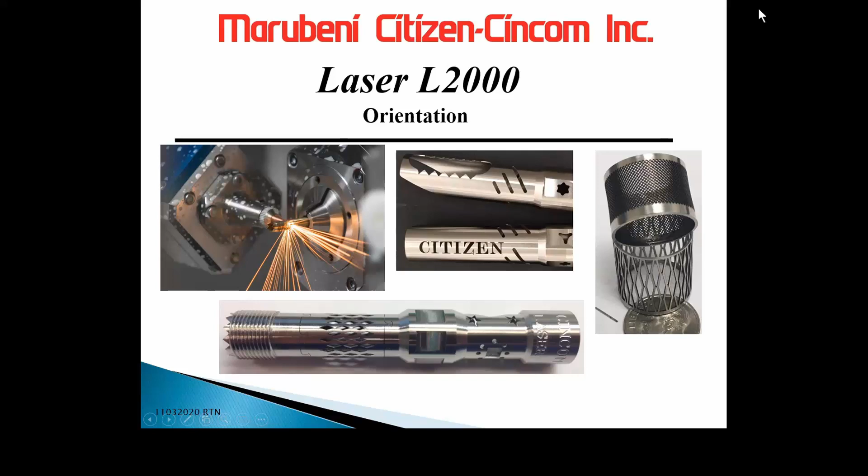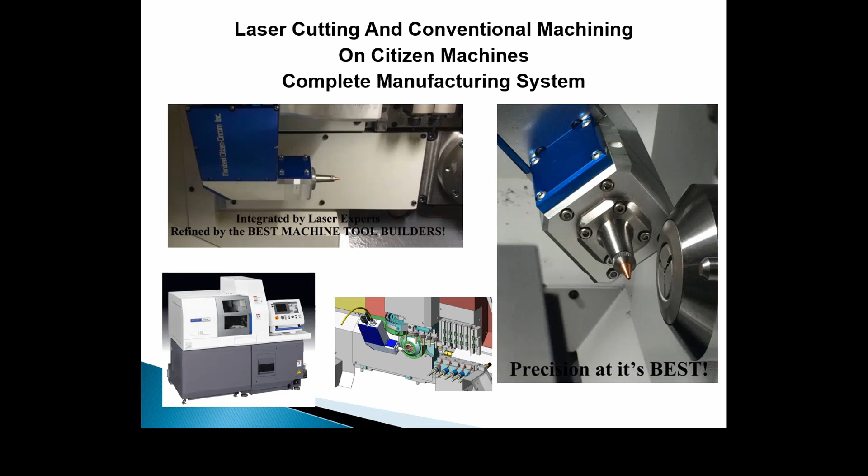Our L2000 laser system began development in 2013 and was available on the market in late 2014. We developed this as an add-on option that could be attached to not only new machines but certain older generations of our L series machines. We designed this to have as little effect on the machine's capability as possible.

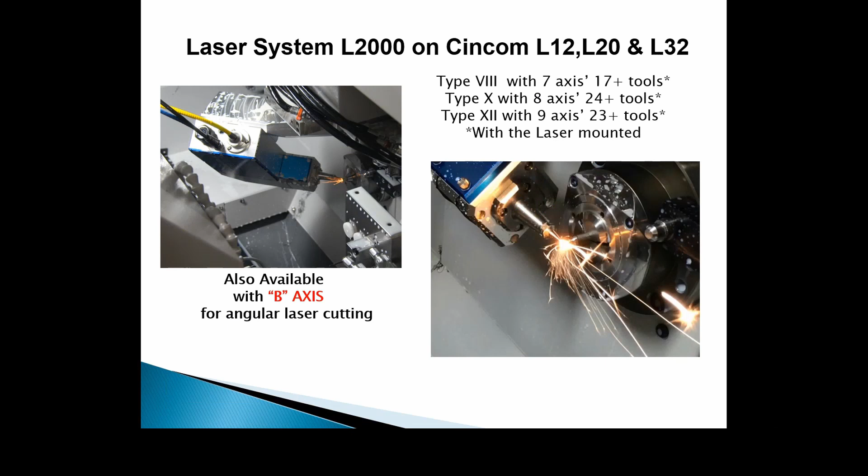The L2000 is available on all of our L series machines from 12 millimeter to 32 millimeter, also on our A20 Type 7 machine, and beyond that, our Miyano BNA 42mm GTY machine.

Some of the major benefits of having a laser in a multi-axis machine is you can cut just about any shape, get minimal burrs, it's faster than EDM machining, you get conventional machining and laser machining on one platform. And you can do laser cutting and or welding with a single head.

With the use of a bar feed, you can run up to 12-foot long bars, tubing, or solid stock. This will allow you to get continuous, unattended operation out of your machine.

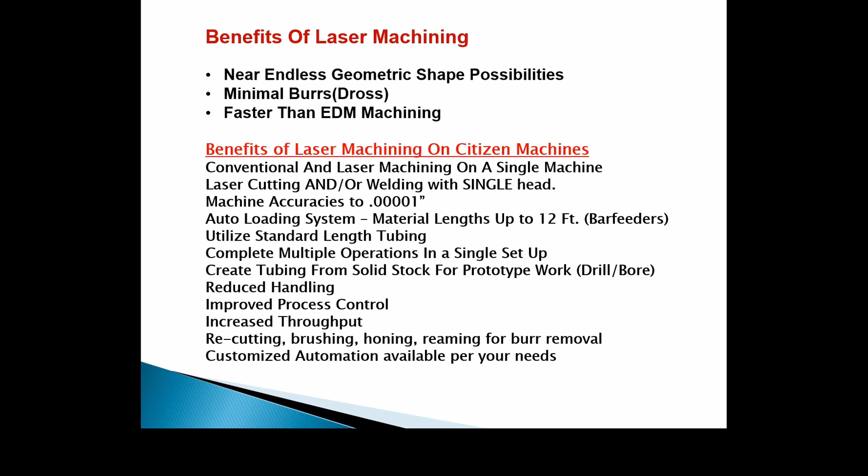With the multi-axis machine, you'll be able to complete multiple operations in a single setup and attain reduced handling, improved process control, and increased throughput. You'll also be able to do any recutting, brushing, honing, reaming for any burr removal that might be needed.

We utilize the IPG Photonics lasers in our system. They are the leading provider of lasers in the world. The laser is 100% supported in the USA. We have multiple power levels available from 100 watts all the way up to 3 kilowatts, all air-cooled.

Our system has an internal pulse generator with endless parameter possibilities. We've included an air conditioning unit built into the cabinet for temperature control. We can connect up to 3 gas supply lines.

We have integrated our system so well into our machine that we can program everything that's needed from the part program. We have programmable modes with pulse mode, burst, continuous wave, or quasi-continuous wave. We can create special macros from the part program, send it to the laser.

We also have programmable gas or air pressure and the type and selection from the program. And to top that off, we have a programmable collimator to fine adjust the focus position. You can tell the focus where to be on the part from your part program.

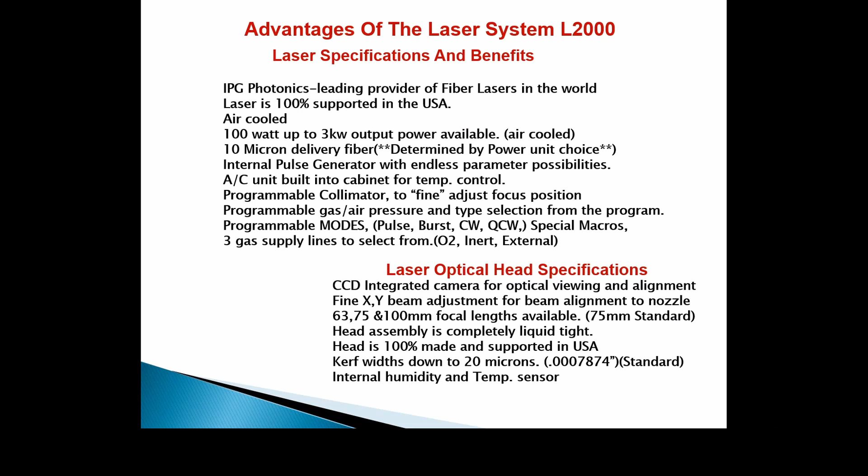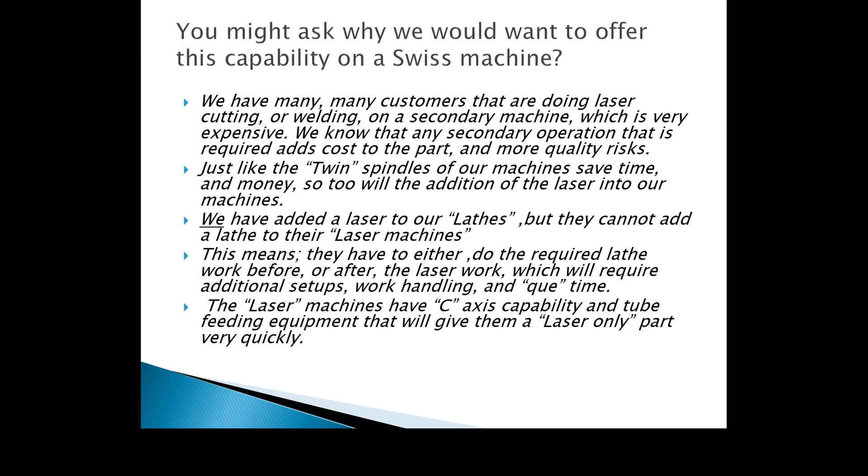So you might ask, why would we want to have a laser on a Swiss turn machine? What we found was many of our customers were doing parts that had to go to a secondary operation to have some laser cuts done, some of them very simple, just a turn angle or so forth. When that happened, they had secondary setups and queue time and all of this. Now we've tied it all into one machine, so you're in one process, you get a complete part straight off the machine.

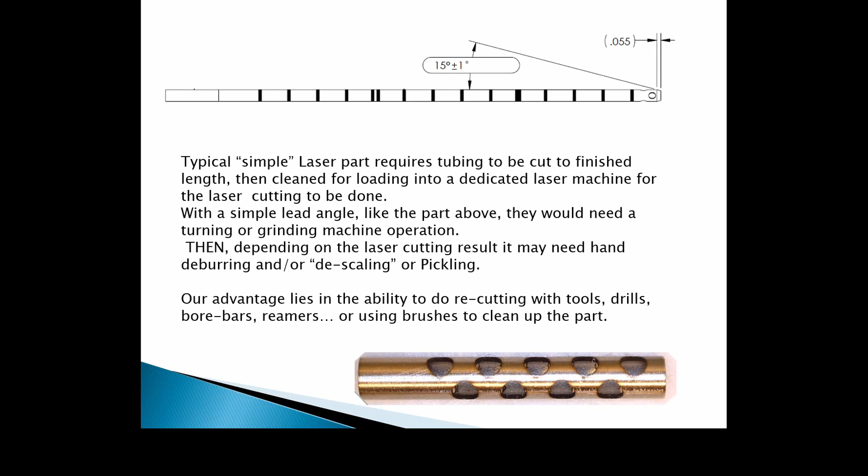The typical components of a traditional laser machine has a laser oscillator or power unit feeding the fiber down to the laser cutting head, which is also being supplied assist gas of some type, depending on the material you're cutting, going through the nozzle around the beam.

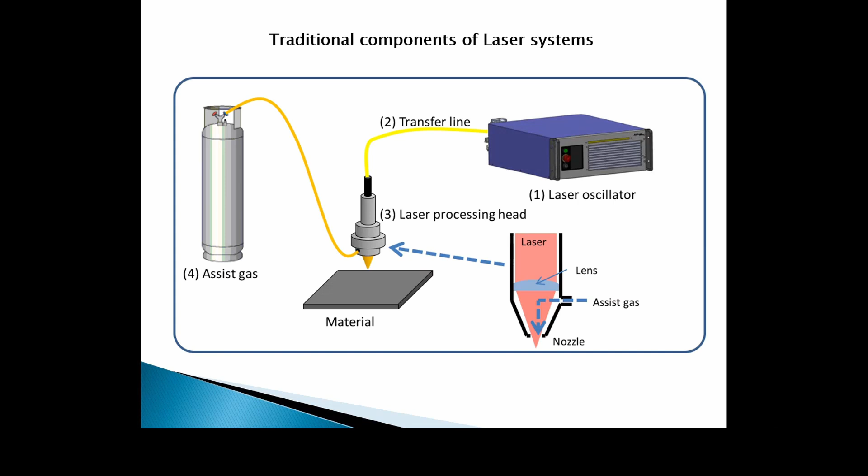The L2000 system has a control cabinet located behind the machine, which encapsulates the power unit. The power unit has the fiber, which runs through conduit up into the machine, into the laser head, which is mounted from the gang plate.

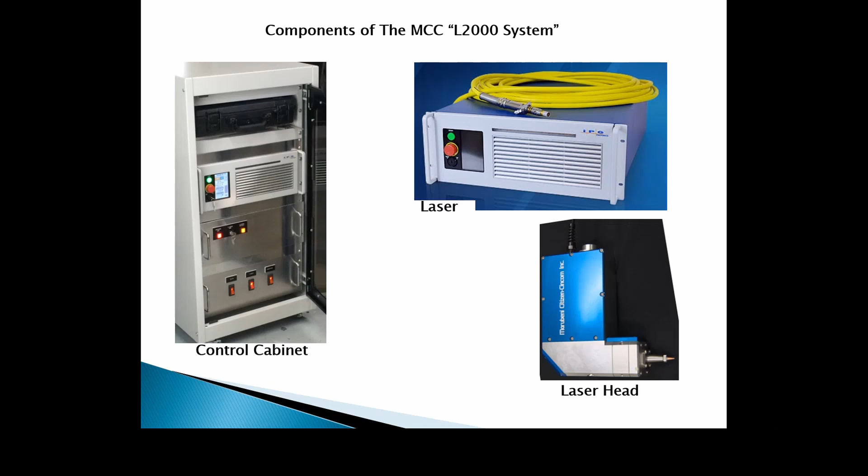We have mounted a touchscreen PC monitor above the machine control, which will display the settings being sent to the laser, and also has the software for the camera, which you get the camera view that is looking out through the nozzle. The camera view is most helpful during setup or replacement of the nozzle, which helps direct the assist gas around the beam as the beam is cutting into the material.

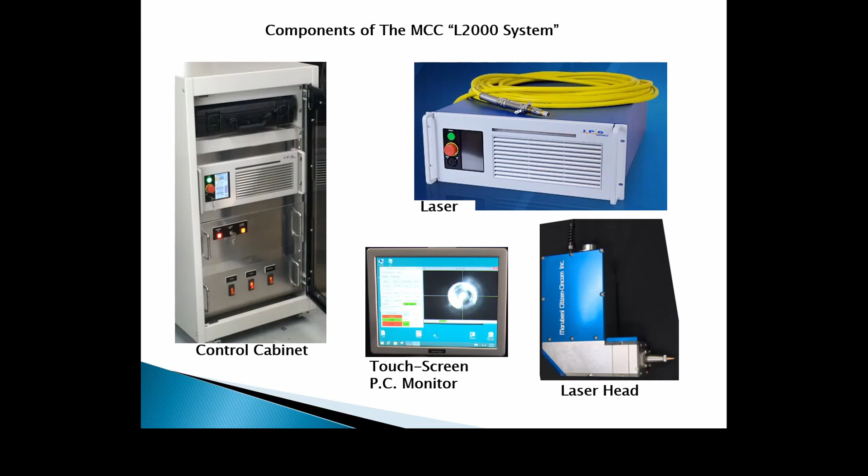The laser controlling software is called IPG Link. This is where the cutting parameters are displayed when they're sent to the laser unit.

The settings needed for the laser to work is going to be setting the mode, the pulse width, the size of the beam shots, the frequency, how many beam shots per millisecond, the percentage of power of the unit that you are using, the gas type you're using, inert, oxygen, or air. You will also set the pressure for any air, gas, whether it's inert or oxygen.

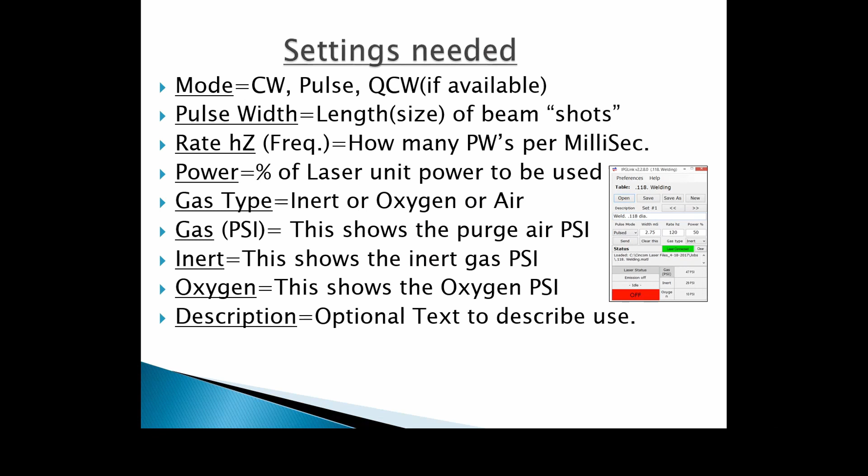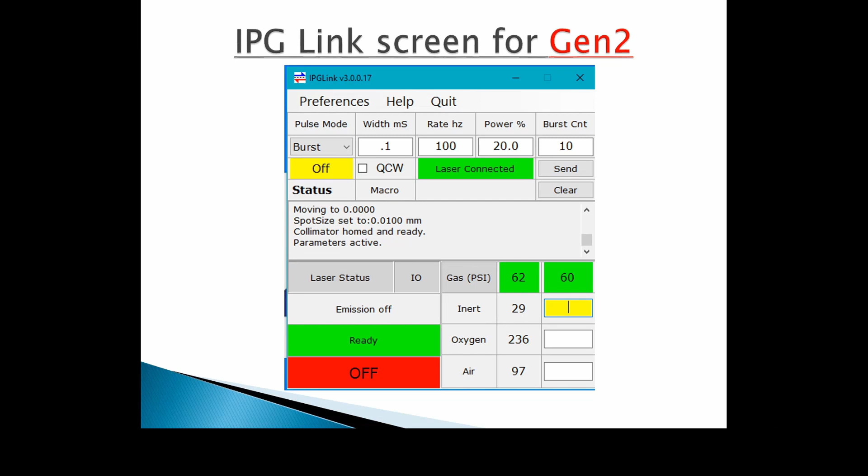Here we have the IPG Link screen, which will be displayed up on the PC monitor. Here you will see the commands have been sent from the part program to the system to show you what is happening with the laser system at any given moment. You can also manually enter information here to do a kind of a test before you run through the program to see if everything will be accepted by the system.

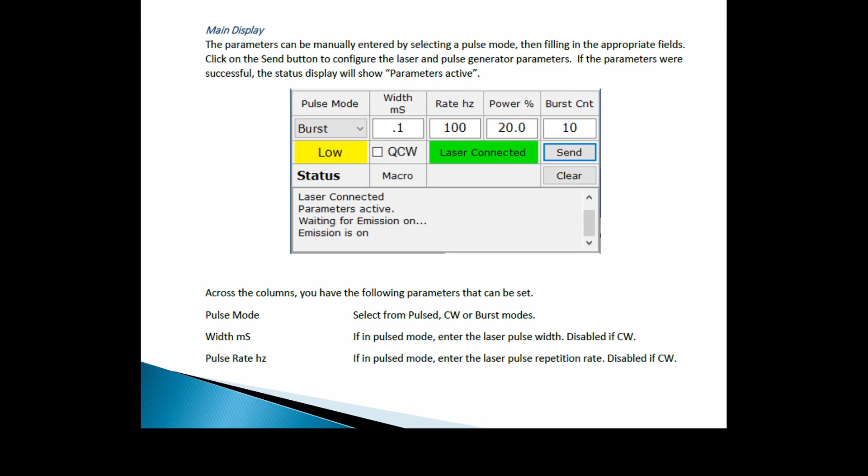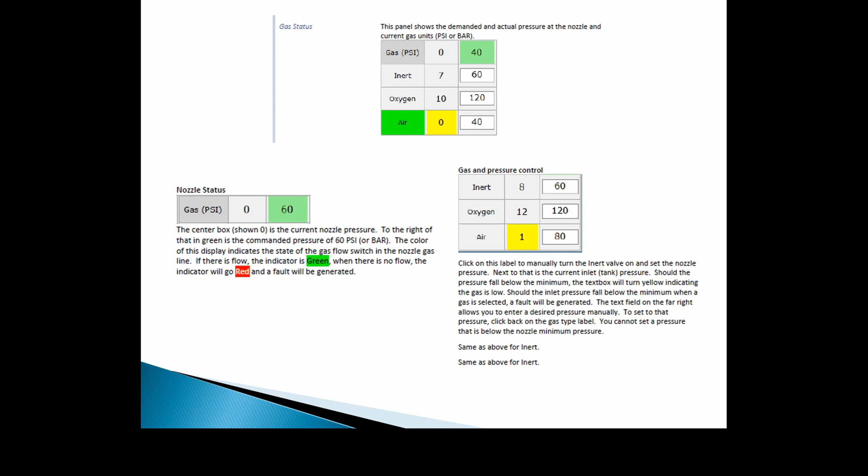Displayed here are the available pressures and the program pressures that might have been sent from the part program to the laser system. The status box is a list of the last 4 commands that were executed by the laser system.

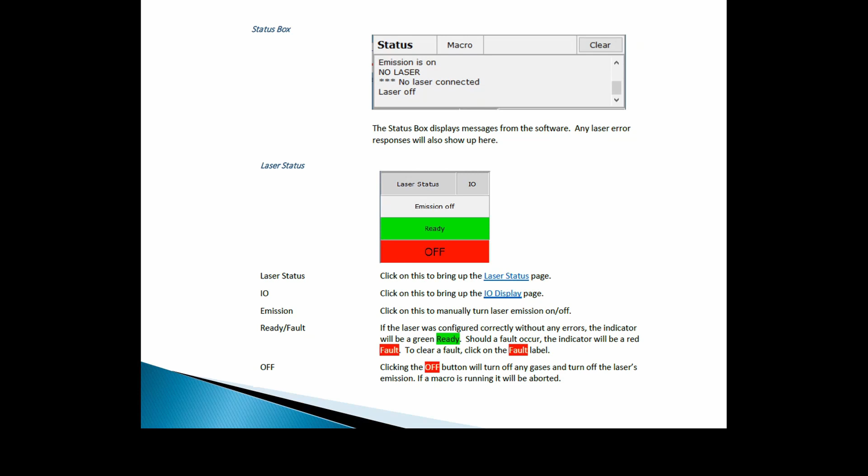In the lower left corner, there are a few buttons that you could push. The laser status brings up an additional box showing the status of different functions of the system. The I/O button also brings up another box which shows what inputs and outputs are being executed. Then there is the emission button where you could turn emission on and off, and the ready fault tells you if it's in the ready state, fault state, or stop. And then the off and on button at the bottom.

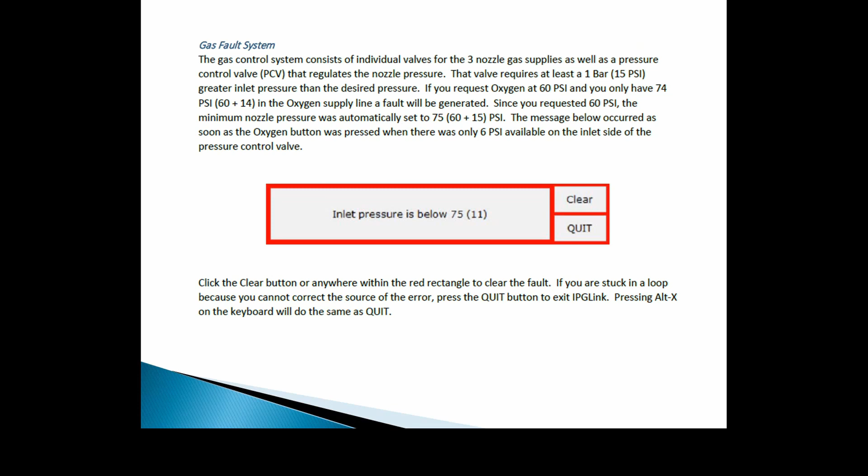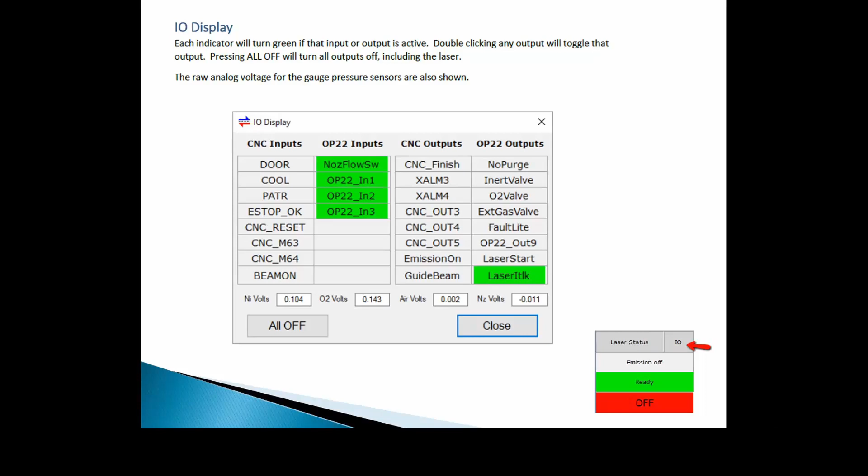In the main display box, it will show you any faults or errors that might occur during the system, giving you a short explanation as to what might have gone wrong. When pushing the laser status button, it will pop up this box here, which shows the status of different functions inside the system. Here you have the box that will pop up when pushing the I/O display button.

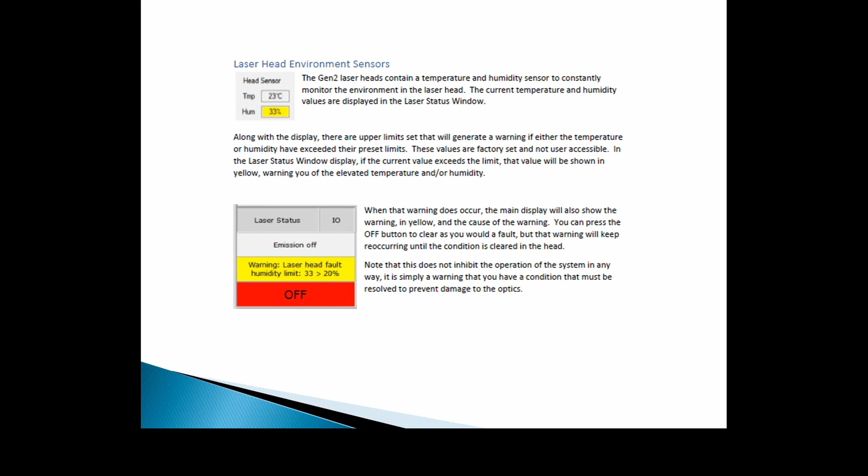Our system contains a temperature and humidity sensor to constantly monitor the environment of the laser head. The current temperature and humidity values are displayed in the laser status window.

Once you have completed any cutting, welding, or etching that you needed with the laser, you will deactivate all the settings by giving it the simple command, all off.

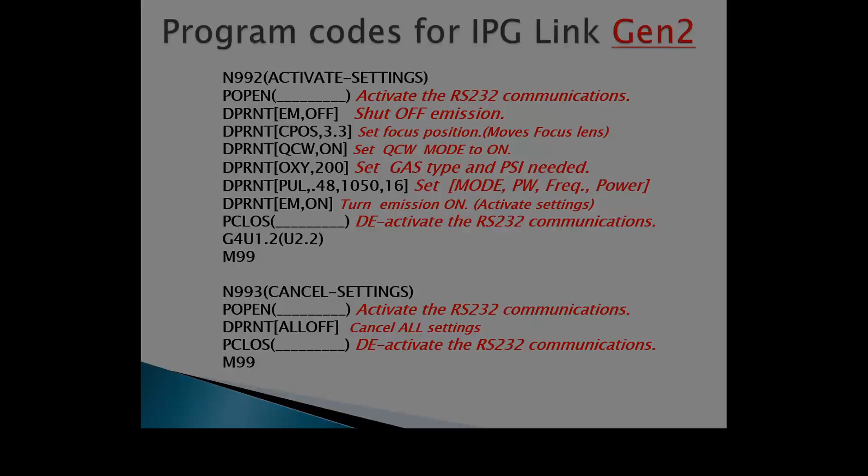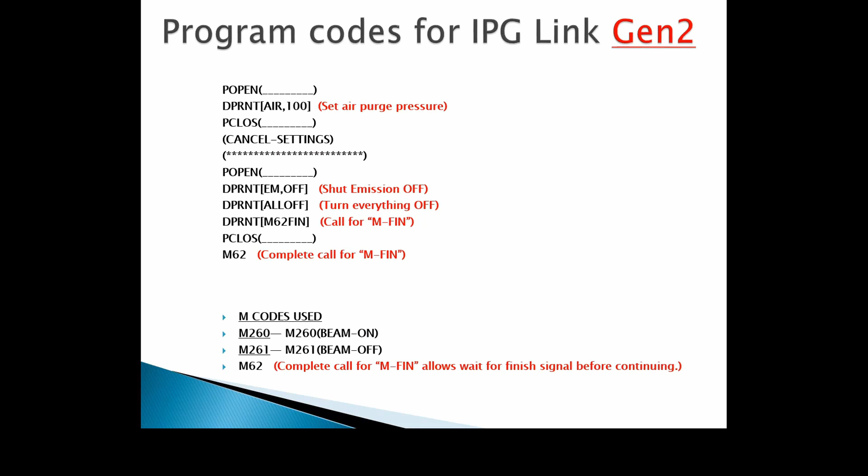There are a few additional commands that you may use in the system at times. At the bottom, you will see the M codes used. These are M codes that turn the beam on and off. M260 turns it on when you're ready to cut and already in position. M261 is used when you have finished the cut, shutting it off immediately.

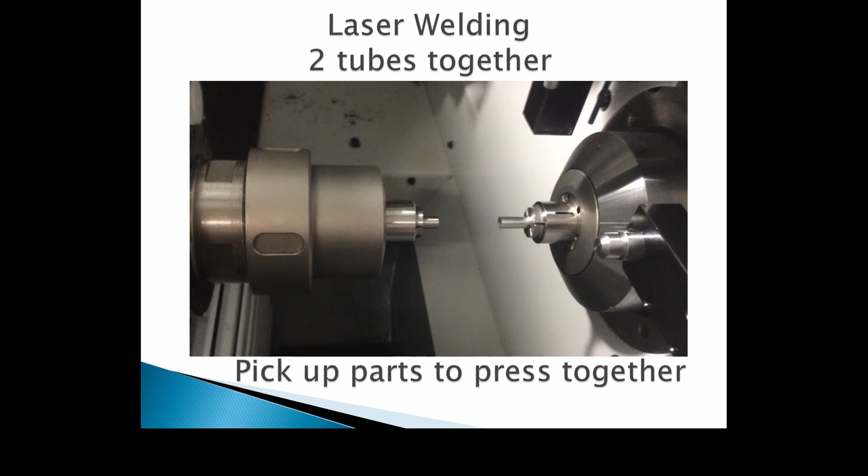Our system has the ability to laser weld as well as laser cut or laser etch. With welding, there are no adjustments that need to be made that cannot be made from the part program. The biggest challenge you're going to reach is, we're going to weld two parts together. Where are the two parts going to come from? One might be bar stock, another might be bowl fed into a loader of the machine into the subspindle.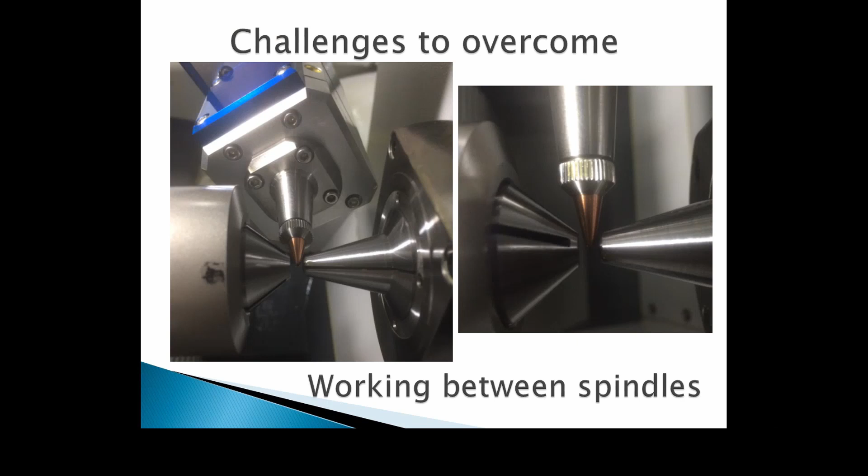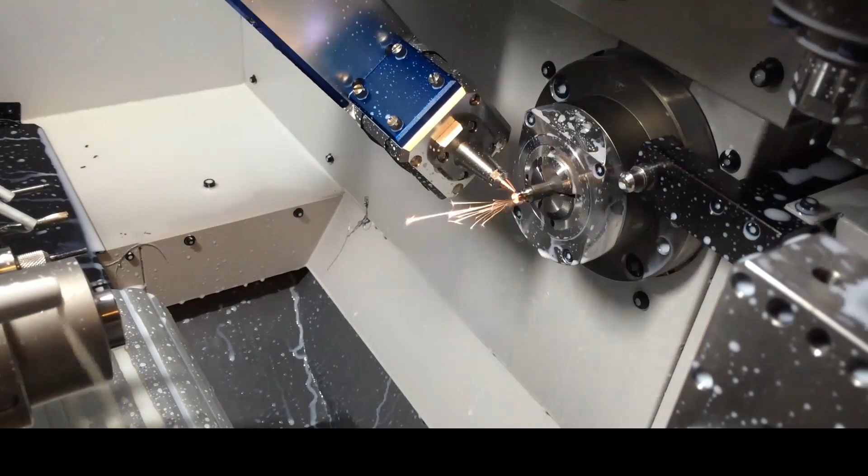Now to show you some sample parts. Here's a shaft part with dovetail-like cuts along the shaft to make it flexible. Next, we have a small titanium part that was made out of solid stock, so we had to drill, bore, ID groove, turn the OD, and do the laser cuts. This particular part we actually cut off with the laser also because of the flimsiness of the part.

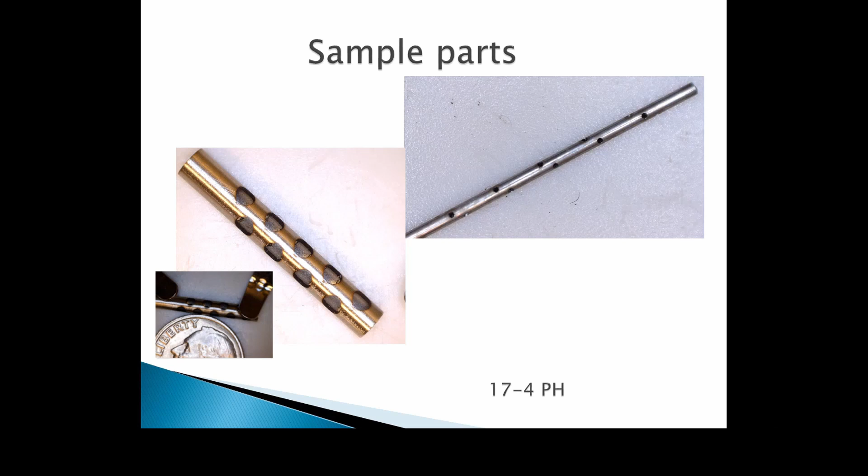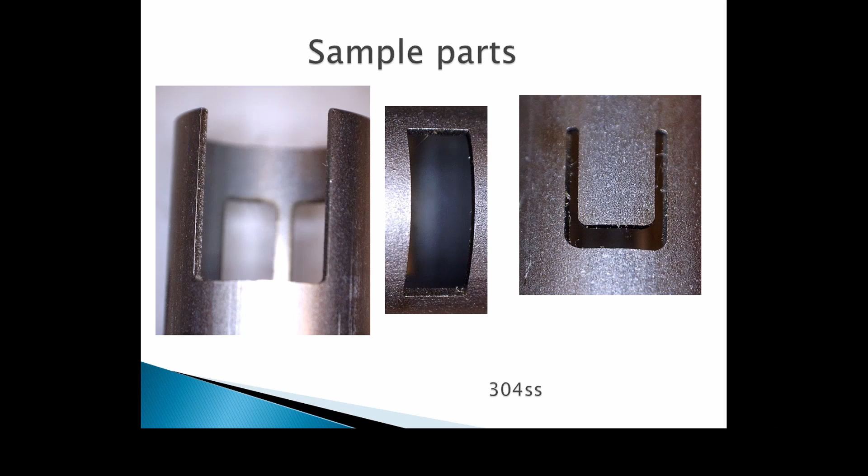Often we're running very small tube out of different types of material with hole patterns in it, helical patterns, spaced out patterns. We generate the holes just like we would with an end mill. There were many medical parts that were already being laser cut off the machine. So what we were able to do was take these tubes, put them in the machine, and do all these fancy little cuts that they needed, little windows and bendable tabs and so forth that come out dross-free, finished part right off the machine.

We've done multiple materials, so you can see Inconel here, copper, a little more challenging, 17-4 as seen in a few of the samples I already showed you, many different shapes, 303, 304, 316 stainless. Here's a 303 part with 1,800 .008-diameter holes in it. This was from solid stock that we had to drill and bore, because it's flat bottom inside there.

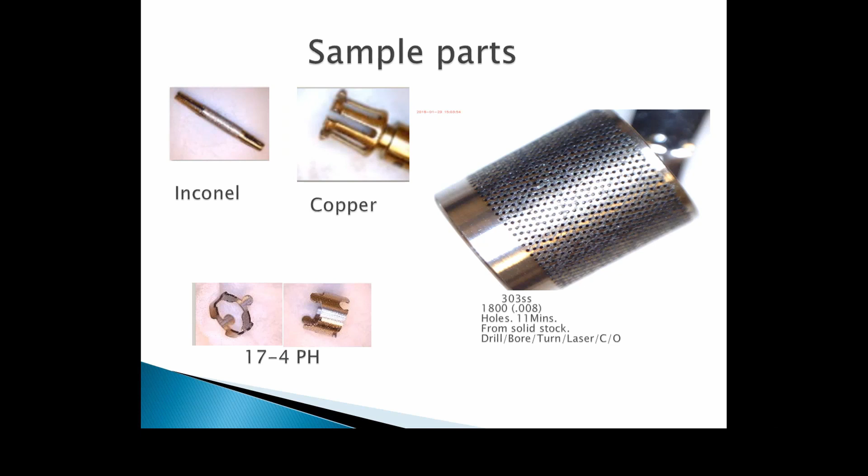It took about 11 minutes altogether because each one of those holes was move, turn on the beam, generate the hole. Here we have a stent-like part being cut.

First, view from the rear of the machine showing you how the laser is approaching the part. Then we will switch to the front view where you'll see more of the stent being cut, and you can make out more of the shapes of what's happening inside the machine during this cut.

As a note, I'd like to point out that we're running dry just for the video. Normally we would have not only high pressure coolant running, but coolant through the bar stock at the same time.

When we bring the machine to machine shows, we have to show the capability of the machine, so we do many different shapes. A lot of the shapes that we find on the customer's prints we apply with different sizes onto a part so people can see that we can do these.

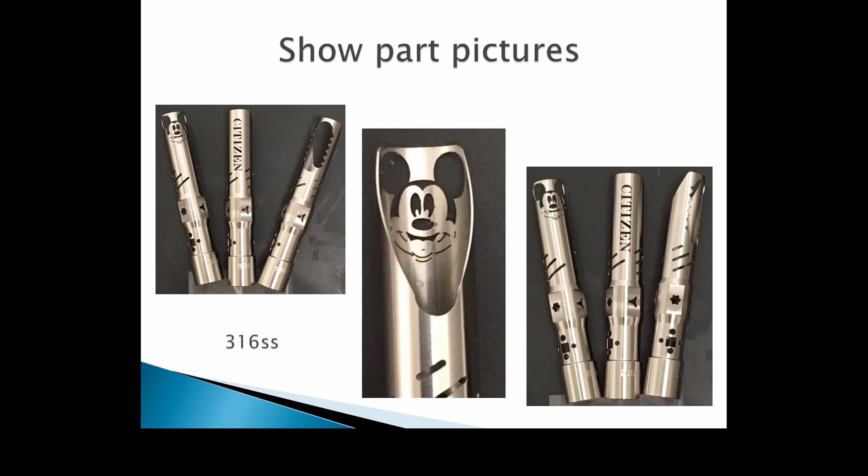Here you can see hexalobes, trilobes, and hexes. Another part here where you can see it has teeth on the face, has an OD thread, sort of a puzzle type cut and a stent cut.

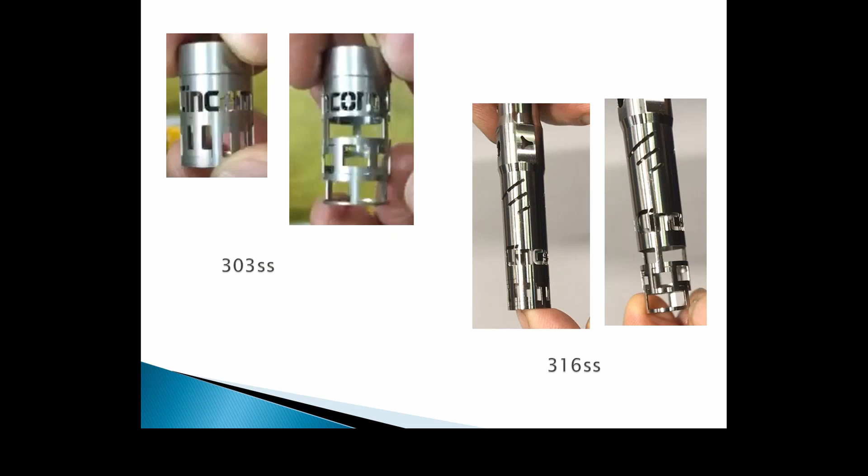This part here was very unique. Because of all the shapes that were cut in it, it was actually able to expand the part.

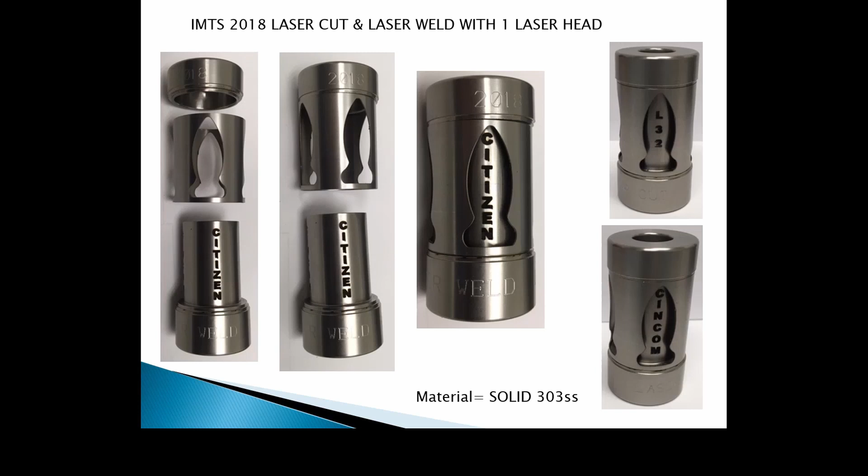Now we have a multi-part in one program with laser cutting and laser welding. This was from solid 1.25 inch stainless steel, where it was drilled, bored, and turned, then pressed together and welded. Then the second part, same thing, and then the third part was pressed into the second part and welded back together. So it came out, ejected out of the machine, in one solid piece.

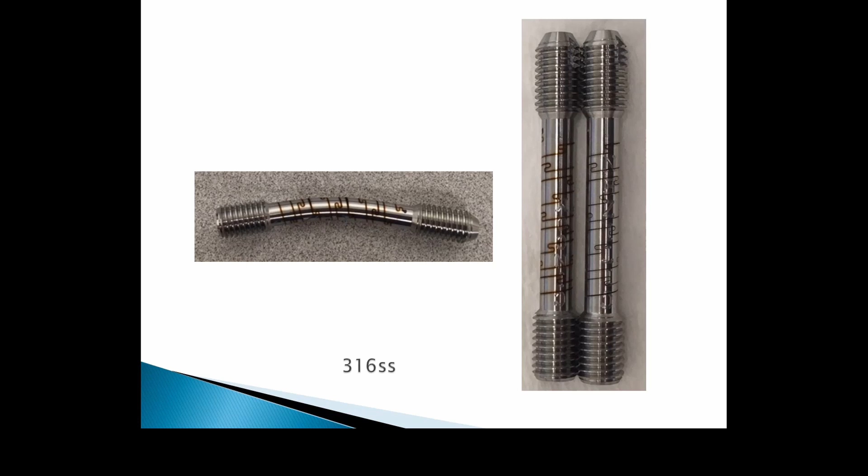Here we have a laser cut flexible bone screw. It has a bone thread on both ends, and in the middle on the shaft, which was turned down, is a laser cut. You can see in the left picture the flex that it had.

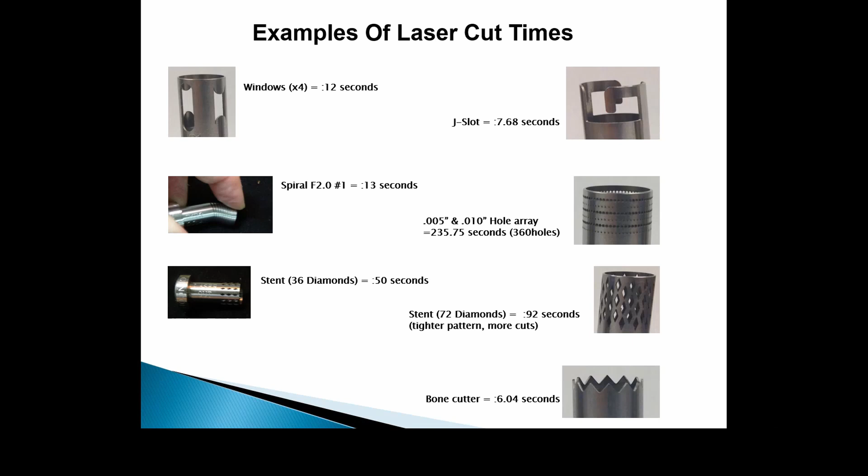As I mentioned earlier, there are virtually endless possibilities of the cuts that you can do with the laser. Here are some somewhat common cuts that we see in parts and the cycle time that it took for just the laser portion of the cut.

Thank you for joining us, and I hope this has given you more insight and information on the laser that we offer and how it can be used for some of the parts that come across your desk. If you have any questions, see your local dealer.

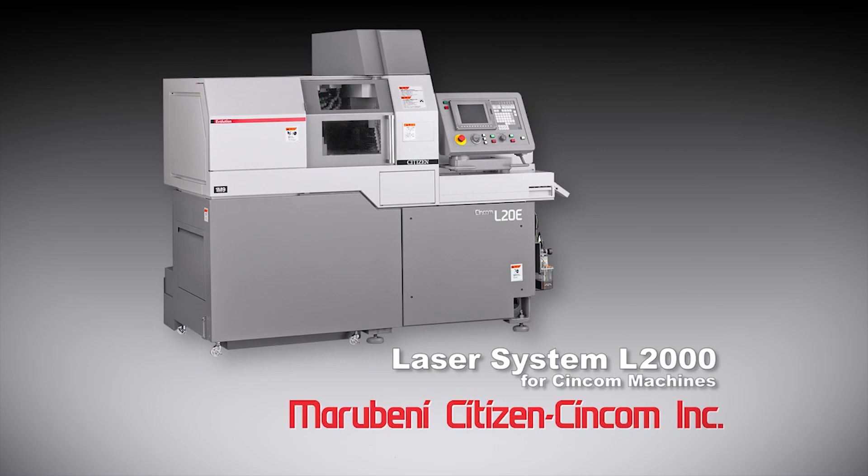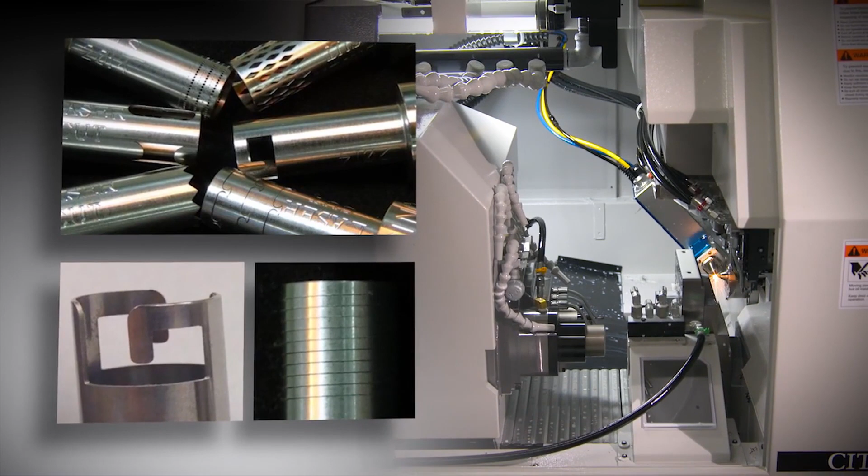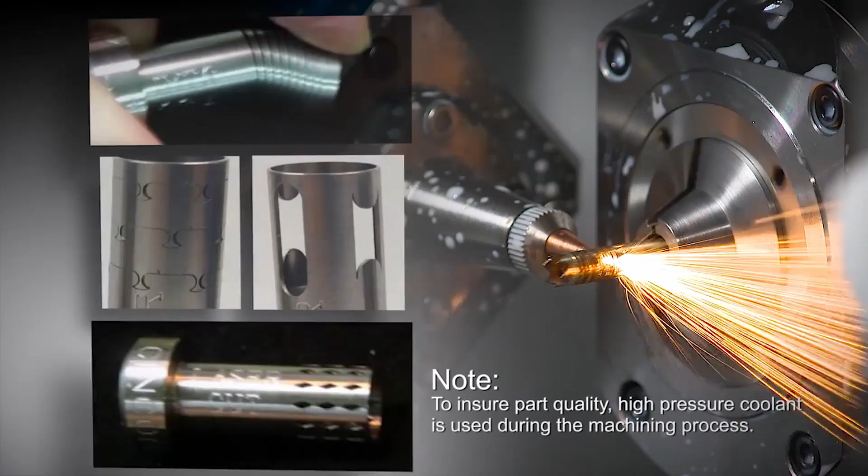Thank you. The Marubeni Citizen-Cincom laser system L2000 is a 10-micron fiber optic system offering high-precision, high-speed laser cutting. Incorporating the L2000 on a Cincom Swiss-style lathe provides the capability of combining conventional Swiss machining and laser cutting on a single machine platform, reducing part handling and ensuring improved part accuracies.

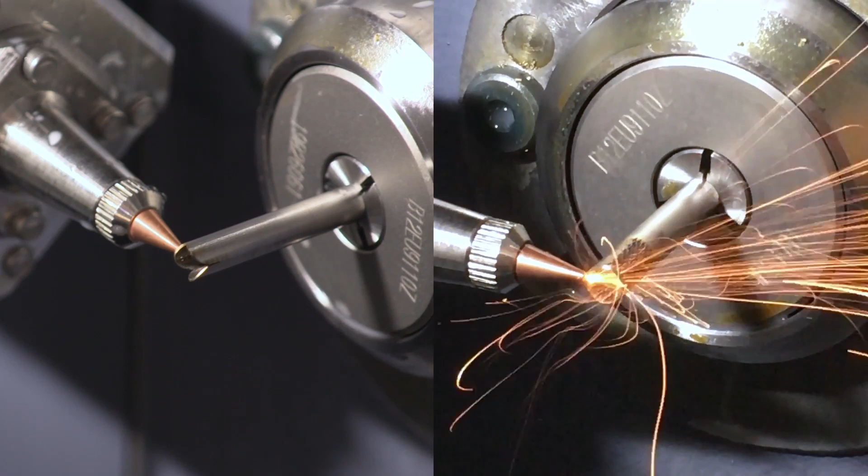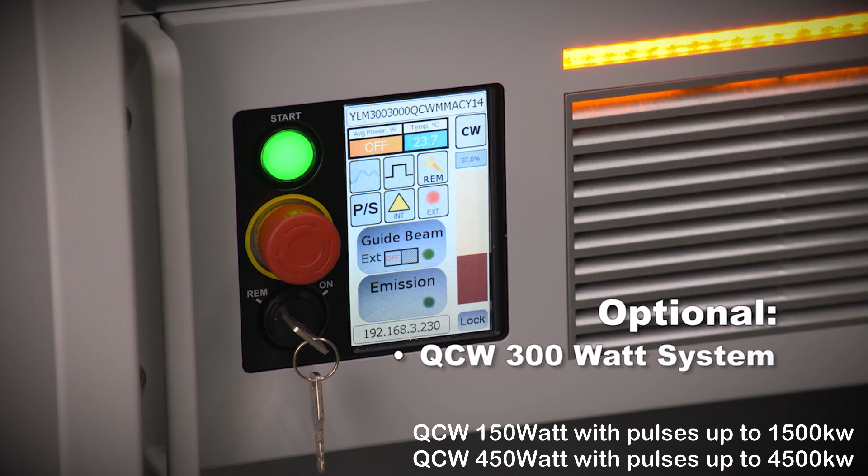The L2000 utilizes the IPG Photonics 400-watt laser unit. IPG is the world leader in providing fiber optic lasers and is fully supported in the US. Additional power units are available that address specific application requirements. One option is a QCW, quasi-continuous wave 300-watt system that can provide power bursts to 3 kilowatts for extra power when needed.

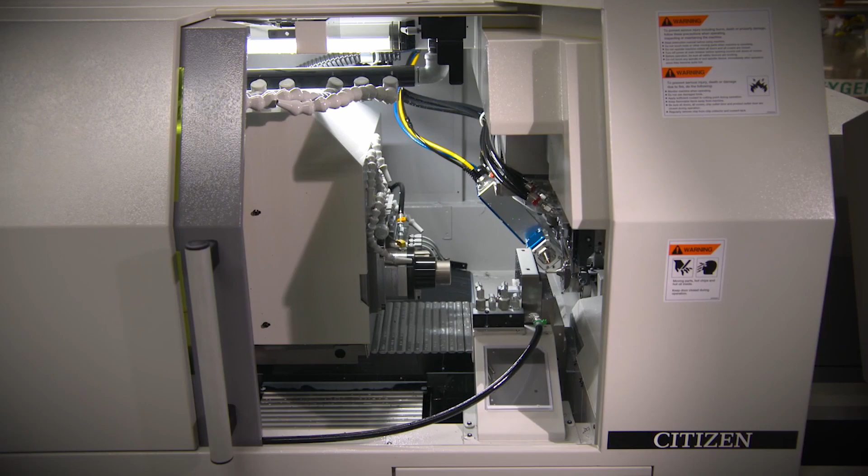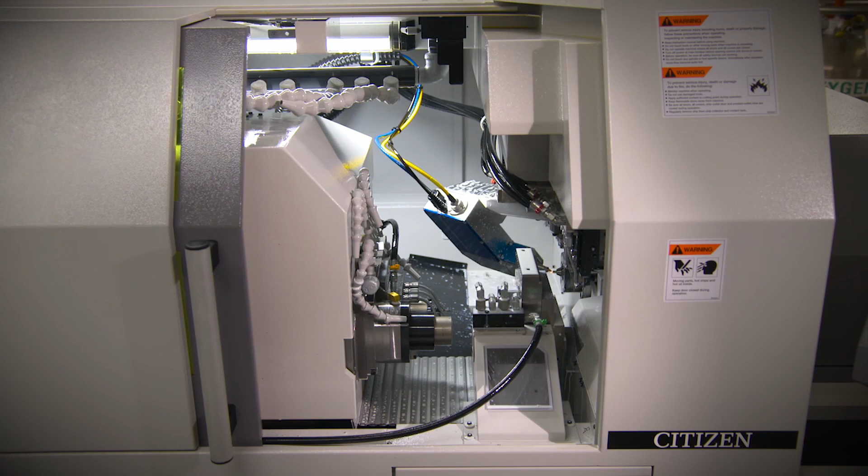The laser head assembly mounts on the gang tool slide of the Cincom machine. The movements are programmed in the part program of the machine control. The unit has the unique capability of also mounting on the B-axis tool position, allowing for laser cutting at various angles for components that require angular laser cut features.

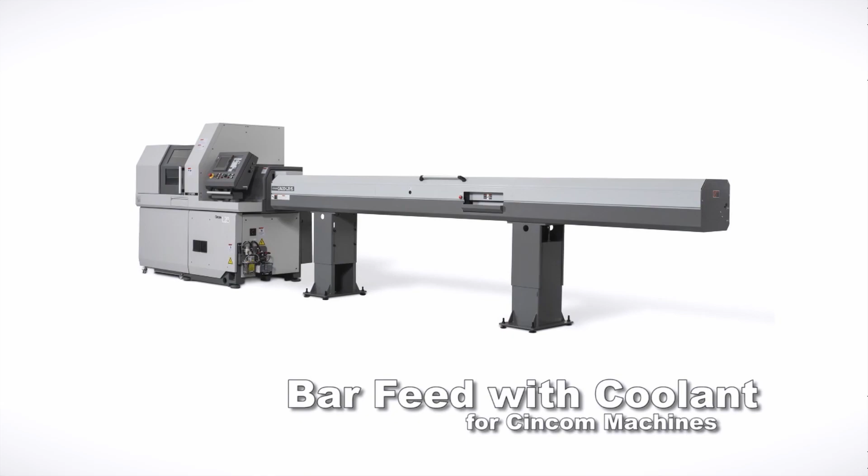The laser head assembly is liquid tight, so it's capable of operating while high-pressure coolant is flooding the workpiece during the machining process. Internal air pressure protects the lens and internal components. High-pressure coolant that is used during the cutting process also feeds coolant through the tubing material in the auto-loading bar feed system. This provides a flushing of dross or chips that are created during the laser cutting process.

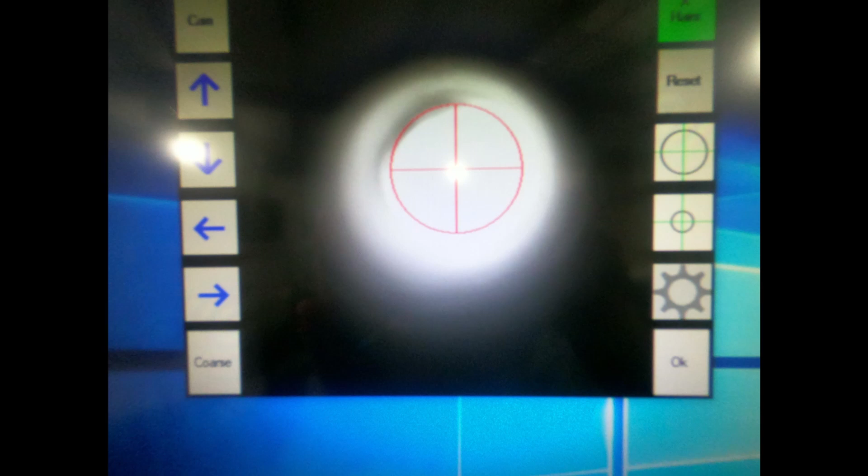An integrated custom-designed CCD camera for optical viewing and alignment is included for XY beam alignment to the nozzle. The live camera is visible on the included touch monitor. This greatly reduces setup time.

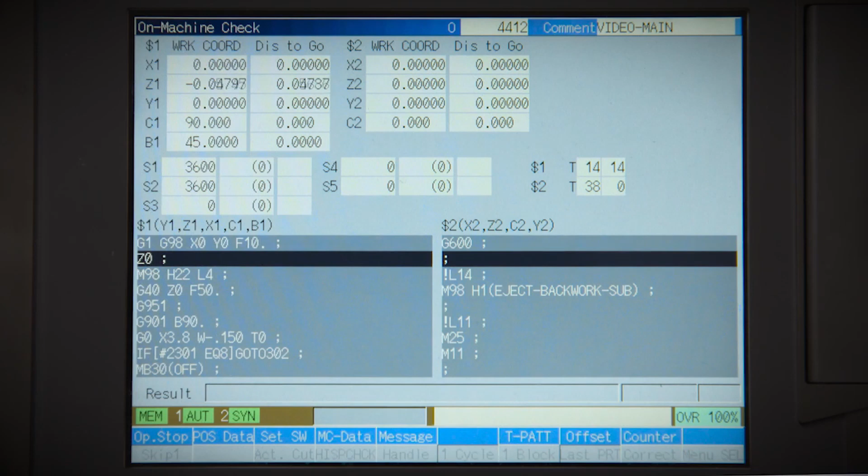The L2000 is completely interfaced to the Cincom control. Cutting path and offsets are fully controlled and edited in the machine control. Laser power and gas type can be selected from the part program.

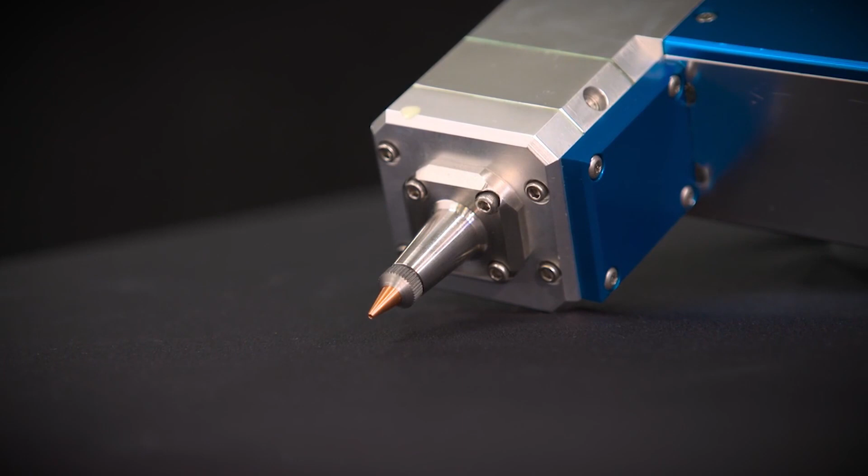One of the unique features of the L2000 is that it's a modular system and not designed for a specific model Cincom machine. The system can also be retrofitted to some older model Cincom machines.